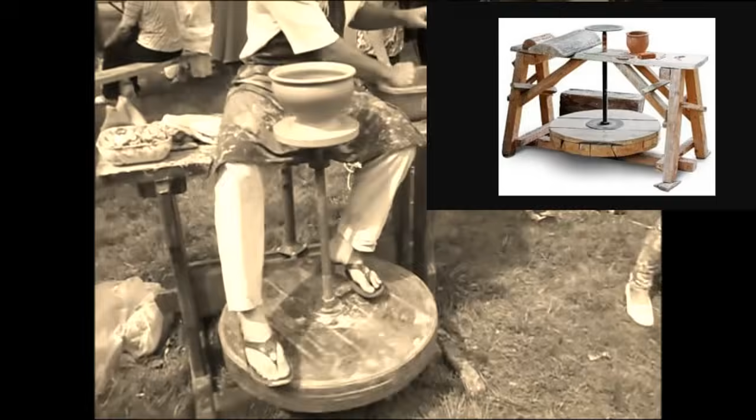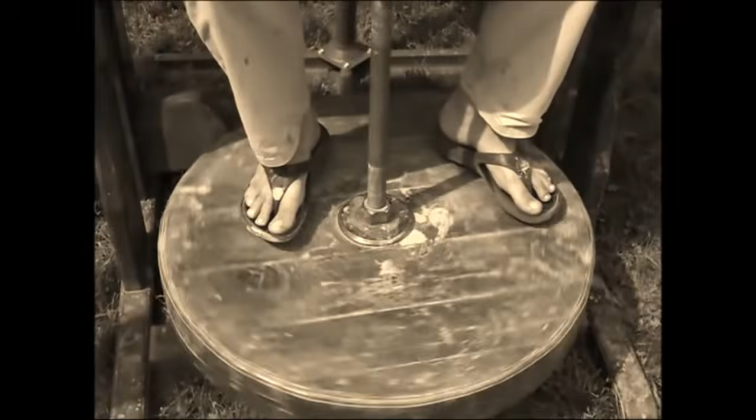A flywheel is a mechanical accumulator of kinetic energy, the principle of which has been known since ancient times, from the potter's wheel, where a rotating wheel accumulated the energy of the artisan's hands and ensured uniform motion, to 19th century steam engines, where massive flywheels smoothed the piston's movements.

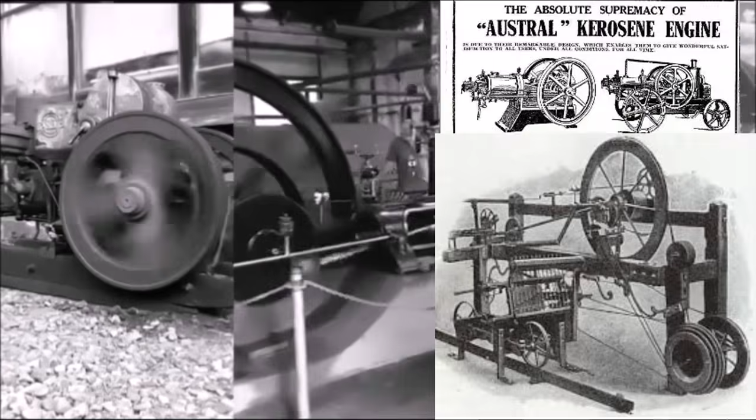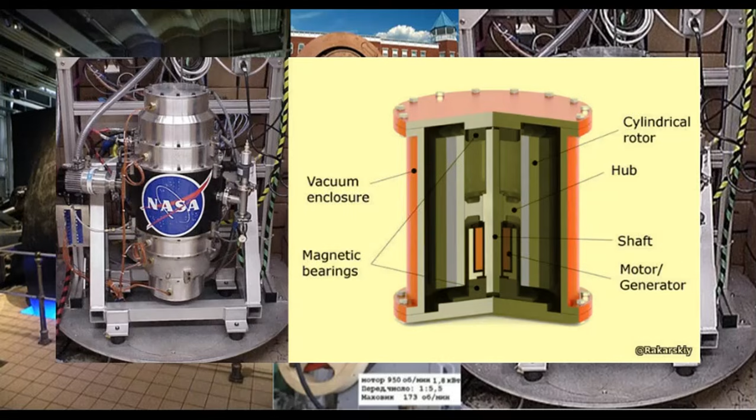In the 20th century, it became a key element of internal combustion engines, and in the 21st century, it has evolved into a high-tech storage device, a superflywheel made of composites, capable of storing energy at tens of thousands of revolutions per minute. Today, such systems are used in the energy sector for grid balancing, in transportation for energy recovery, and in spacecraft as reaction wheels for precise attitude control, demonstrating the evolution from a simple wheel to a complex tool for future technologies.

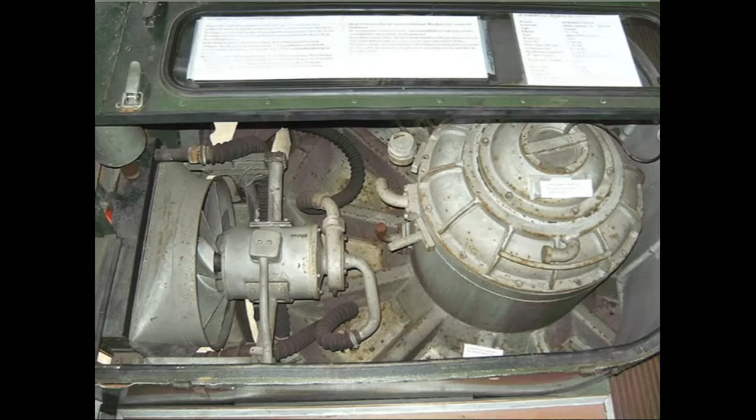Back in the 1940s, Swiss engineers developed a new type of zero-emission electric bus that used a large rotating flywheel to store energy instead of batteries. The gyrobus was powered by an electric motor, which was powered by a generator that used a large rotating flywheel to store energy. The flywheel was rotated at charging stations using 3 arms mounted on the roof of the vehicle.

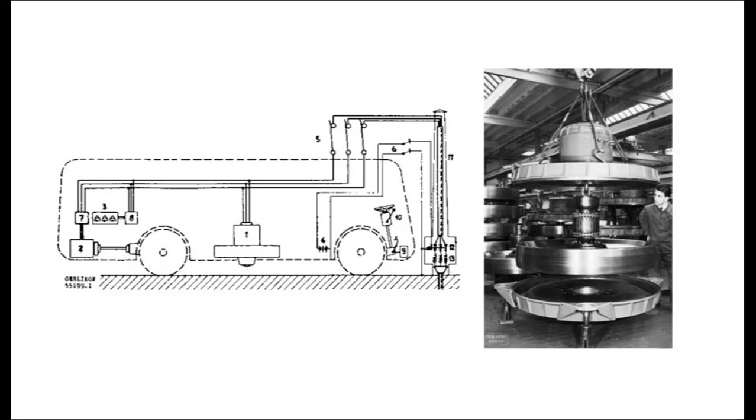When the flywheel reached its maximum speed of 3000 rpm, it was fully charged, and the bus could travel up to 6 km at speeds of up to 50 to 60 km per hour, depending on the load on the bus and the slope of the route. At one installation in Yverdon-les-Bains, vehicles sometimes traveled up to 10 km on a single charge.

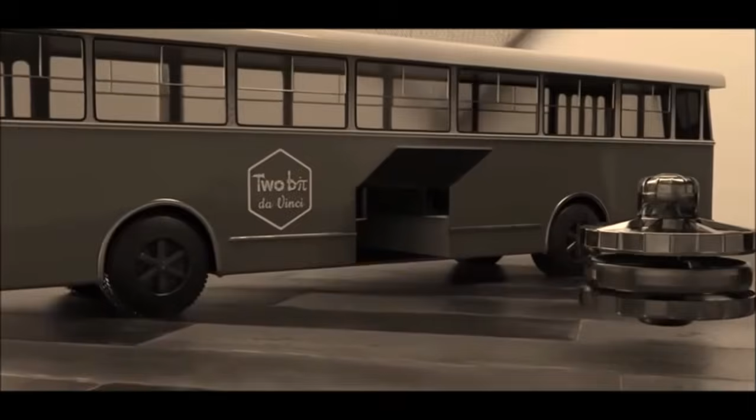The flywheel used was quite large, 160 cm in diameter and weighing 1.5 tons, and was also placed in a sealed chamber filled with hydrogen under reduced pressure for less resistance. Charging the flywheel from a standstill took up to 40 minutes, but after turning, adding additional energy to the flywheel took only 2 to 5 minutes.

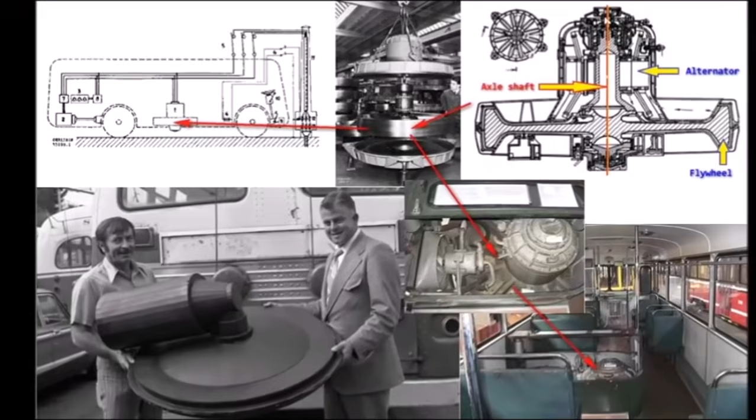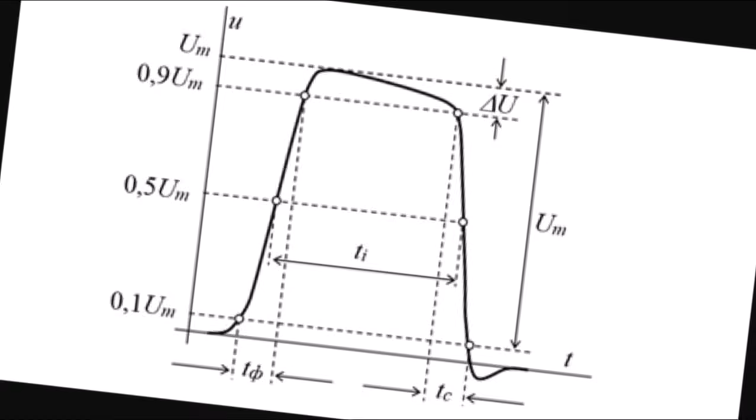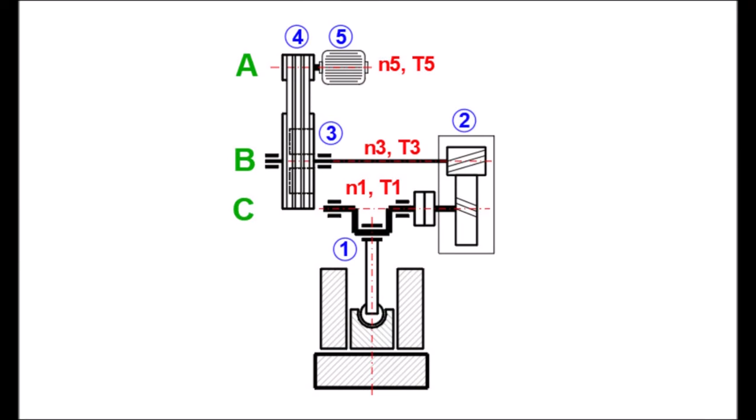An electrical impulse is a short-term surge or jump in electrical voltage or current in a certain circuit or system, reflecting a rapid change over time. The analogy of an electrical impulse in the form of a kinetic impulse is used in mechanics in devices such as a crank press. The working tool of this press is a die. The pressing force is created by torque. In turn, the torque is made possible by an electric drive.

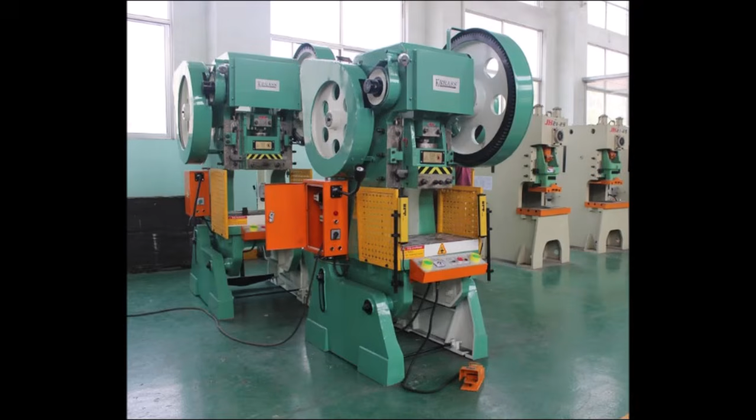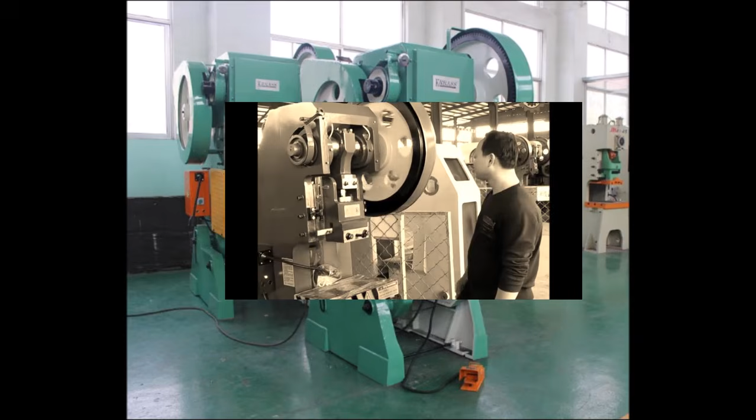The drive consists of an engine, a gearbox, brakes, a clutch and a flywheel. The electric motor rotates the flywheel, and due to the force of inertia, a torque is created on the crankshaft. Such a press can function both in step mode and in automatic mode. In this design, the flywheel plays the role of a kinetic capacitor, the power of which is measured by dynamic torque.

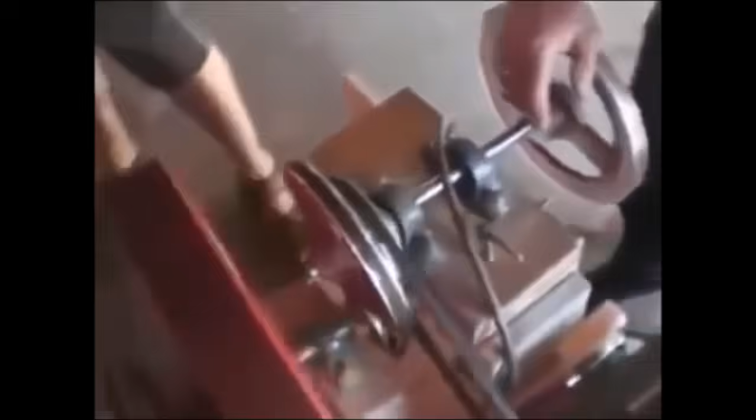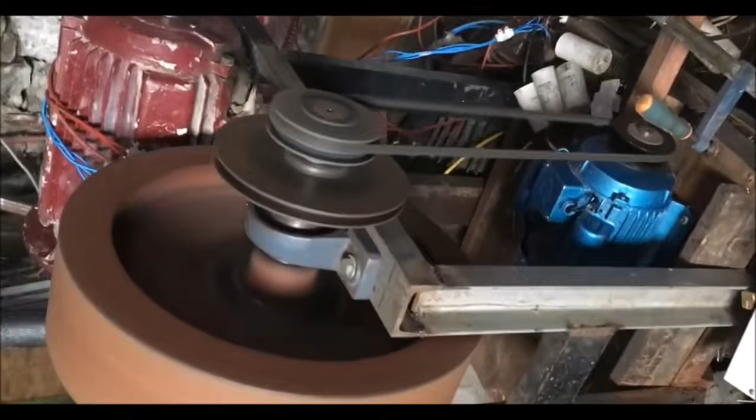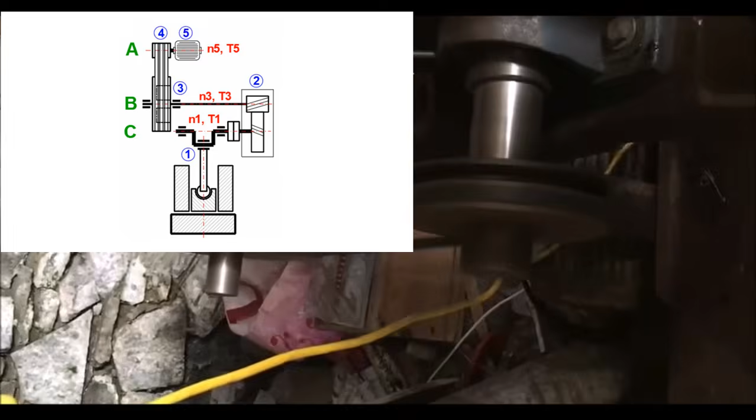In 2018 to 2019, I studied various flywheel rotation modes that allow for pulsed operation with low torque on the drive motor shaft. I conducted mathematical modeling based on the Chas-Campbell flywheel system. Later, I suggested that for single flywheels, it is more efficient to use intermittent generator operation. When the generator is turned off, the flywheel is accelerated using the drive motor. The engine operates in continuous mode, similar to a single stroke of a press.

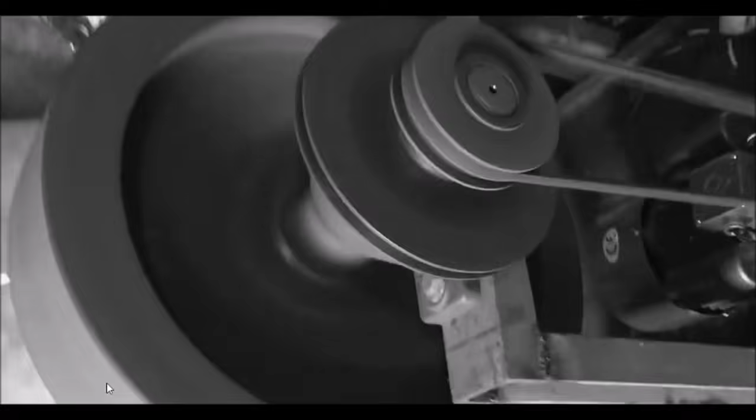Instead of stamping, an electromagnetic generator is turned on, with a power regulator. This option was developed at the request of those who wanted to purchase such a flywheel generator for their own use. Unfortunately, due to the invasion of cannibals in Ukraine, the project was not completed.

In my research, I also proposed a system where the generator is permanently connected to the load. This requires the use of 2 flywheels. The first is a large mass stabilizing flywheel connected to the generator, similar to the version used in the gyrobus. The second is an acceleration flywheel based on data I established during the research.

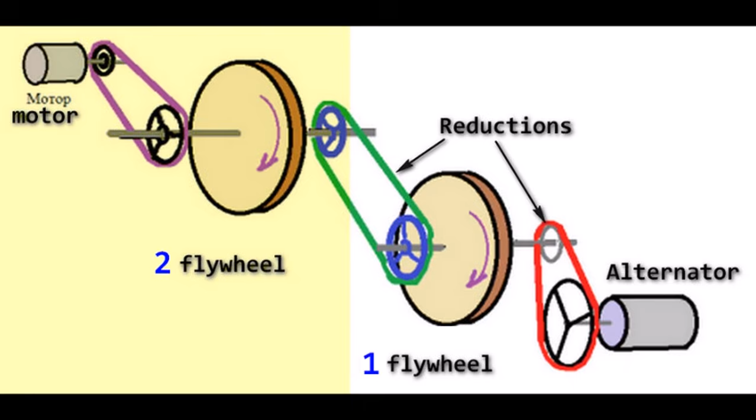This second flywheel accelerates to a moment of inertia where its potential exceeds the moment of inertia of the first flywheel with the generator. After acceleration, due to friction, the momentum of the acceleration flywheel is transferred to the rotation mode of the stabilizing flywheel. At a certain point, the kinetic chain is broken, and the acceleration flywheel accelerates again to a given kinetic capacity zone. The task is to push the stabilizing flywheel, which is effectively one with the generator rotor. The difficult part of this idea was to switch the kinetic node between the 2 flywheels.

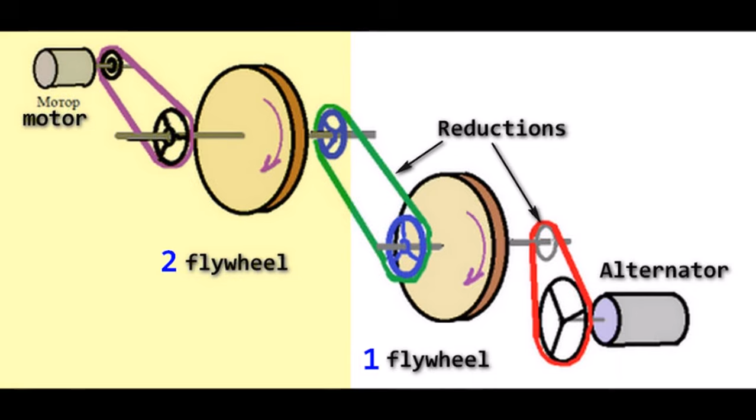In 2025, I saw a proposal on Facebook for a similar design, where a powerful oil-cooled hydraulic gearbox was installed between two flywheels. Units with a capacity of 100 kilowatts to 1 MW were offered. It was visually clear that the engine control system was powered by a battery and had its own closed electrical circuit. Later, I learned about another episode regarding similar inertial generators, made in Ukraine.

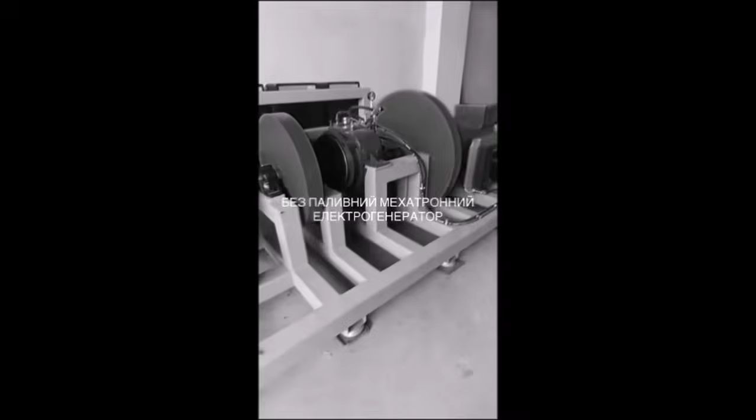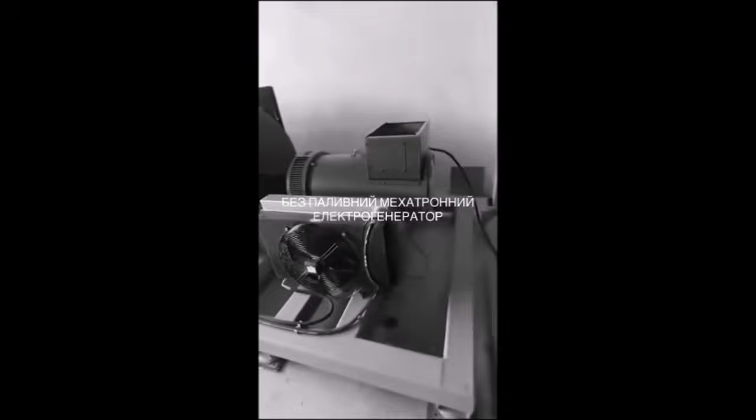A representative of a Ukrainian company made a small review. This time, I additionally received a simplified specification for a 1 MW unit. This data was enough for me to conduct a technical justification using my calculation method. Knowing the characteristics of the two flywheels, the electric motor, the generator, and the hydraulic transmission, I calculated and analyzed the kinetic chain for moments. All the basic requirements for the assembly model that I assumed were fully confirmed.